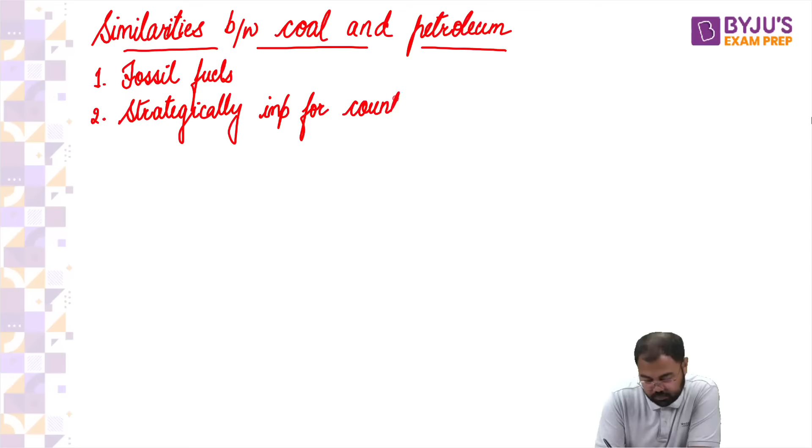So when it comes to petroleum, there are certain similarities and certain differences. Knowing the differences specifically is very important. Similarities between coal and petroleum: they both are fossil fuels, strategically important for the country's economy, and both contribute to pollution and global warming.

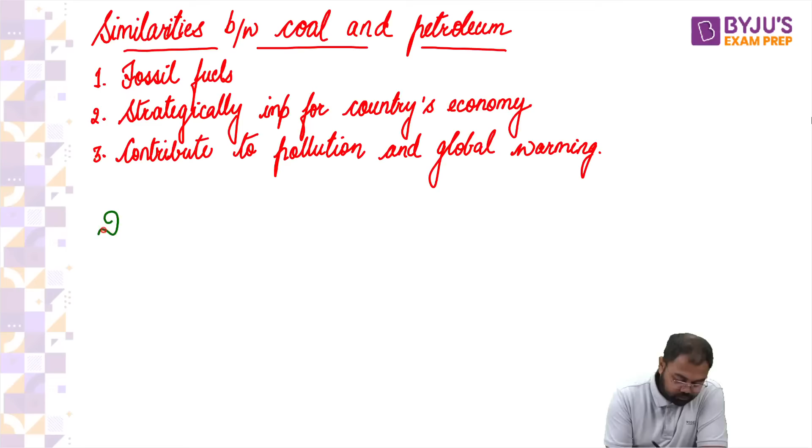Now, what about the differences? Let's look at certain differences between coal and petroleum. First and foremost, the origin. For coal, we had discussed that coal formation might have begun in the wetlands, in the marshy areas, in the swamps on land - swamps and wetlands.

What about petroleum? In case of petroleum, the formation might have begun underwater - the origin here has been underwater, meaning it started its formation underwater. It could be lake beds, sea beds, or ocean beds - in most cases seas and oceans, but even inland lakes might have led to the formation of petroleum. Then, another difference is the source.

Source for coal has been vegetation - all the trees and shrubs growing in the swampy areas contributed to the formation of coal. So the source has basically been vegetation on land, whereas in case of petroleum that's not the case. There might have been both plant and animal based sources - it could have been algae, or it could have been zooplanktons. So both plant and animal based.

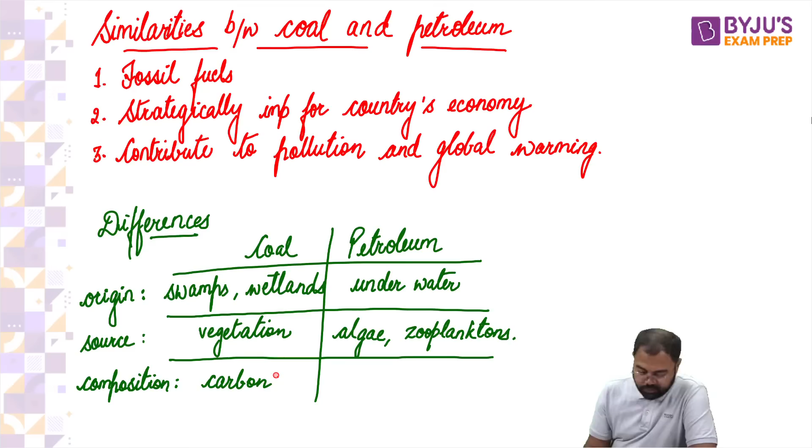Another difference we see is the composition. Coal is basically carbon plus impurities that might have mixed with it over time. Now, when it comes to petroleum, petroleum is said to be a complex mixture of hydrocarbons.

Hydrocarbons - we'll discuss what this means. So petroleum is made of a complex mixture of hydrocarbons. And then lastly, something very well known, the state: coal is in the solid state, whereas petroleum could be solid, liquid, or gaseous.

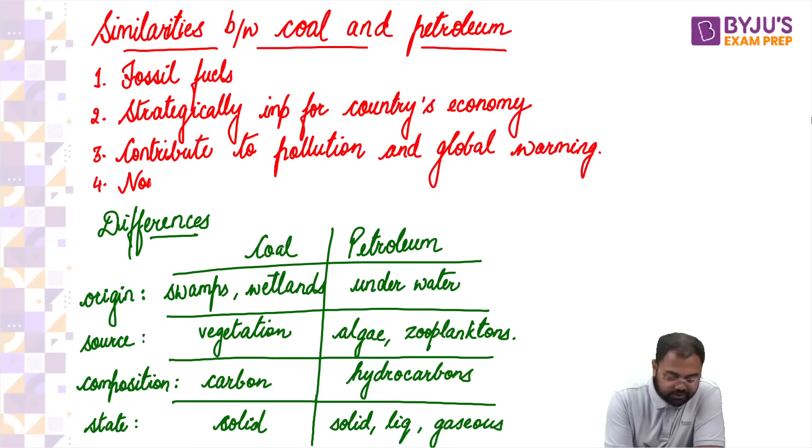So when you look at the science side of it, that's where you see they are different. Otherwise, the other factors show similarities between them, and that's why they're often counted together. One major thing I missed: they will both be called non-renewable. So in this manner, we see there are certain similarities and certain differences between coal and petroleum.

Now when we talk about petroleum, we say it's a complex mixture of hydrocarbons. So what do we mean by a complex mixture of hydrocarbons? What do we mean by a hydrocarbon? The name basically gives you a hint that you're talking about an organic compound - meaning a carbon based compound.

Hydrocarbon - where you have only carbon and only hydrogen, where any compound, any matter, any kind of material has only carbon and hydrogen. Apart from hydrogen and carbon, it does not have anything else. Then in that case, it will be called a hydrocarbon.

Now here we're saying it's a complex mixture of hydrocarbons. When we say complex mixture, it means you might have a lot of different types of hydrocarbons mixed together. That's why you cannot assign a chemical formula to petrol or diesel, because these are complex mixtures - there's no guarantee what exactly could be the chemical composition. There will be a mixture of all these hydrocarbons.

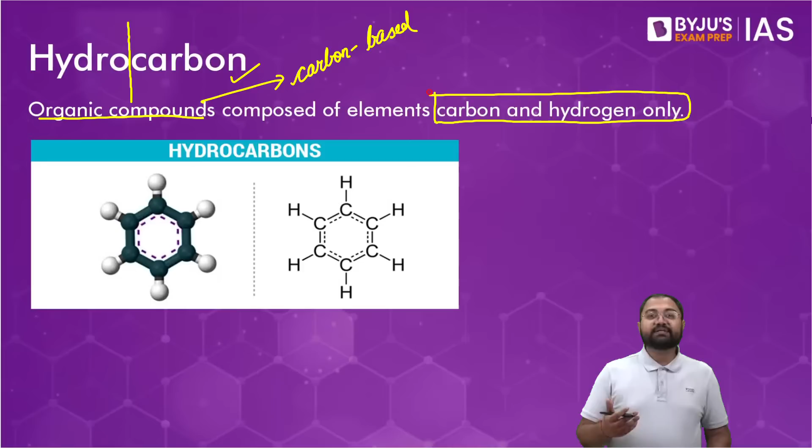So complex mixture - I'm just noting it out here: complex because it has many different hydrocarbons that could be mixed together in a petroleum product.

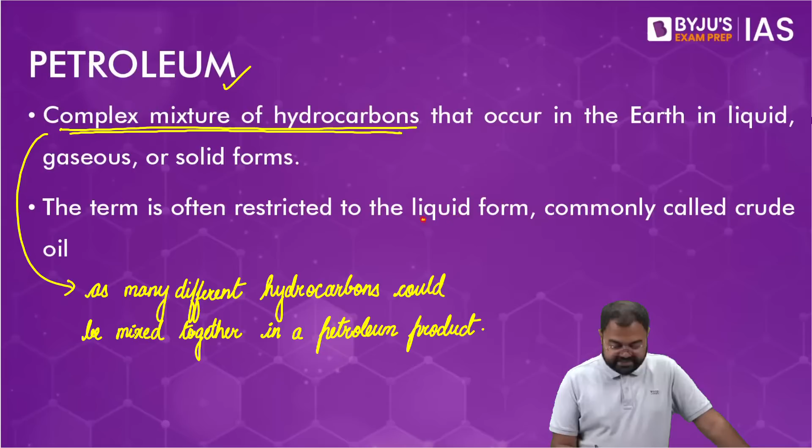So that is basically how we talk about petroleum, how we see petroleum. Often we restrict this petroleum to its liquid form, which is called crude oil. Crude oil is the raw petroleum. From this crude oil we get different types of petroleum, whether it is diesel, petrol, kerosene, jet fuel, naphtha, or even paraffin wax, etc. So crude oil is basically a mixture of all these different petroleum products, and we need to separate them out using a method called fractional distillation. But before that, let's talk about how the formation of petroleum happens.

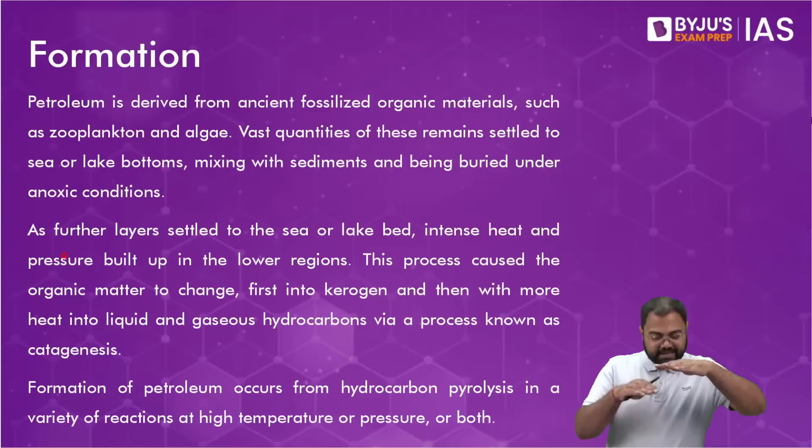Very similar to what we discussed about coal, the entire process is very similar. First and foremost, the formation here would have begun from organic material like underwater plants and animals. They might have gotten submerged under the seabeds or ocean beds, and while getting submerged, they would have mixed with the sediments. As they get submerged, they are going to get subjected to very high temperature and very high pressure, so under these conditions a chemical change would have started in this organic material.

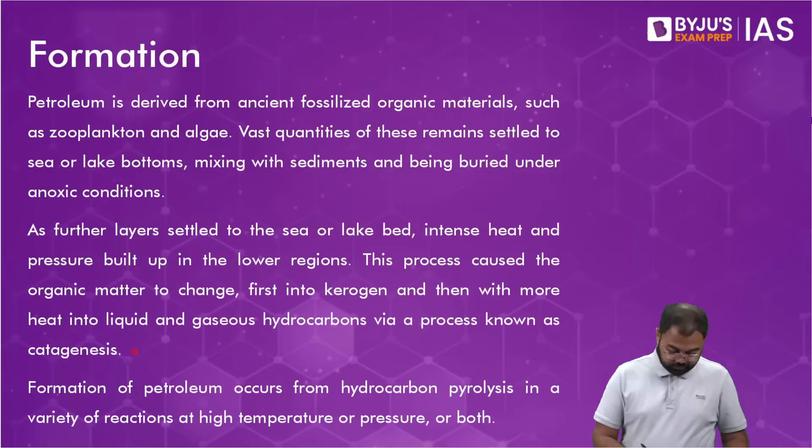And that is where the formation of something called kerogen first takes place. So kerogen is an intermediate stage between that plant or animal and the final petroleum product. So between the two, the intermediate stage that we have is called kerogen, which is in a manner the process of change of organic matter into petroleum. So first, the formation into kerogen happens.

Then there is a process called catagenesis, and this takes place next. Catagenesis is the breakdown of the carbon chains. In any organic molecule or hydrocarbon in these mixtures, there could be hydrocarbons with very long chains of carbon atoms, meaning the chemical formula could be C80, C90, etc., meaning that compound has 60, 80, or even 100 carbon atoms forming a chain-like structure. In catagenesis, these longer chains start breaking down into smaller chains of molecules, so from 80 or 90 odd carbon chains, you might see smaller carbon chains of just 10, 20, 15, 8, 7, etc. That breakdown from longer carbon chains into shorter or smaller carbon chains is called catagenesis.

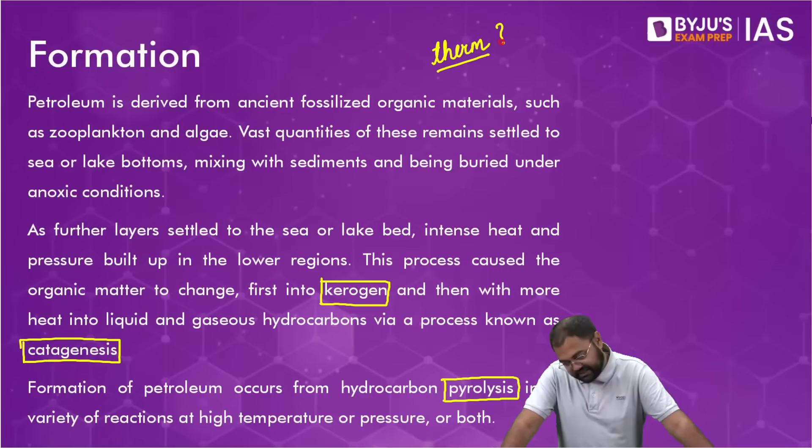Once that has happened, then there is the last process, called pyrolysis. This pyrolysis is nothing but a thermochemical decomposition of material in the absence of oxygen. Because you are submerged under the seabeds or ocean bed, the oxygen supply has been cut off, so there is no oxygen, and there is a thermochemical decomposition. Thermochemical decomposition means a chemical decomposition of the material happening at high temperature in the absence of oxygen. That's called pyrolysis. So these three processes are the key processes to the formation of petroleum from the organic molecule of the plant or animal.

Understood? So first and foremost, you have kerogen first. What is kerogen? Kerogen is an organic molecule which is an intermediate stage between the organic material and petroleum. So this is basically called kerogen. Now, one more thing to note: it is often found as sedimentary rocks.

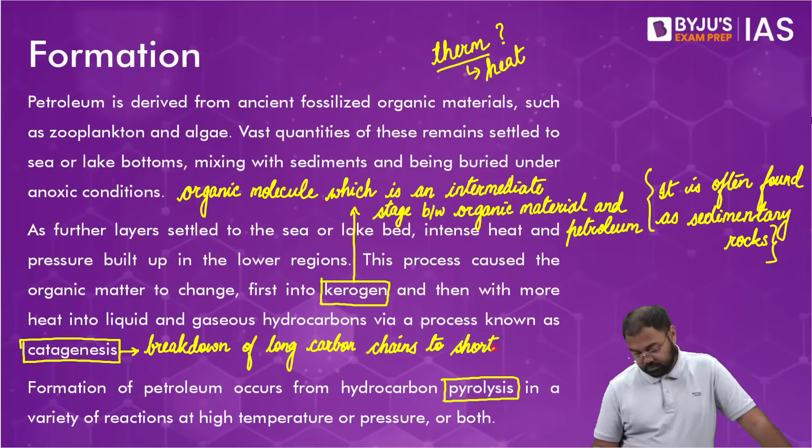Then after that we have catagenesis. Catagenesis is nothing but the breakdown of long carbon chains to shorter ones. So this is called catagenesis.

And then finally we have pyrolysis. So what is pyrolysis? Pyrolysis is the thermochemical decomposition of a material in the absence of oxygen. So this is called pyrolysis.

So all these processes together, they will lead to the formation of petroleum finally. Now, this petroleum product that we get, we get it in the form of crude oil. This crude oil is a mixture of all the petroleum products - petrol, diesel, kerosene, etc. They are all mixed in this crude oil, and we need to get these products out of it.

So for that we use a process called fractional distillation. Now when it comes to fractional distillation, understand what exactly we do here. Distillation is a process that we often use whenever you have to separate two liquids, two miscible liquids, meaning when two liquids mix in one another.

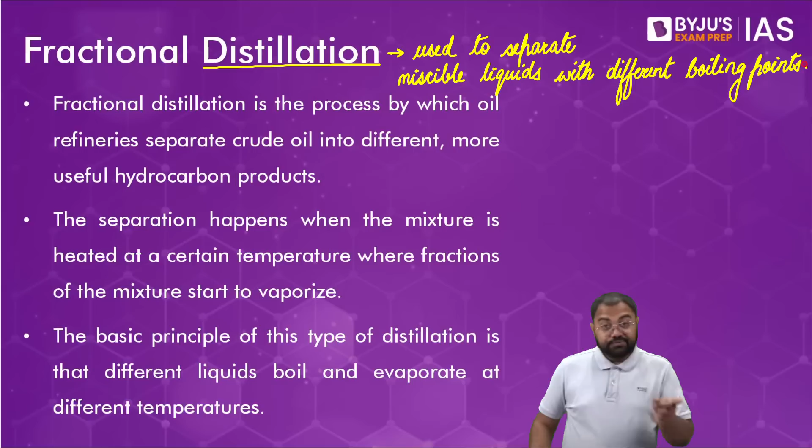Now, fractional distillation as a process is used whenever the difference in the boiling points is not that great. Meaning, if the difference in the boiling point is like just 10 degrees or 15 degrees or maybe up to 25 degrees Celsius, then we cannot use this direct method of heating.

Then in that case, we use an indirect method called fractional distillation. In this process, what we basically do is take this crude oil and heat it to a very high temperature, where all the parts or fractions of this crude oil are in their gaseous or vapor form. We first heat it above 400 degrees Celsius, and then we start to cool it down slowly.

As we cool it down, we'll start getting all these fractions one by one, all these different types of petroleum. So at 400 degrees Celsius, first you'll get lubricating oil, paraffin wax, asphalt, etc. And as you keep decreasing the temperature, you'll keep getting all the different types of petroleum.

So fractional distillation is something that we will use when the difference in the boiling points of the liquids or fluids is generally less than 25 degrees Celsius. So when the difference in boiling points of the liquids or fluids is less than 25 degrees Celsius, fractional distillation as a process would be preferred.

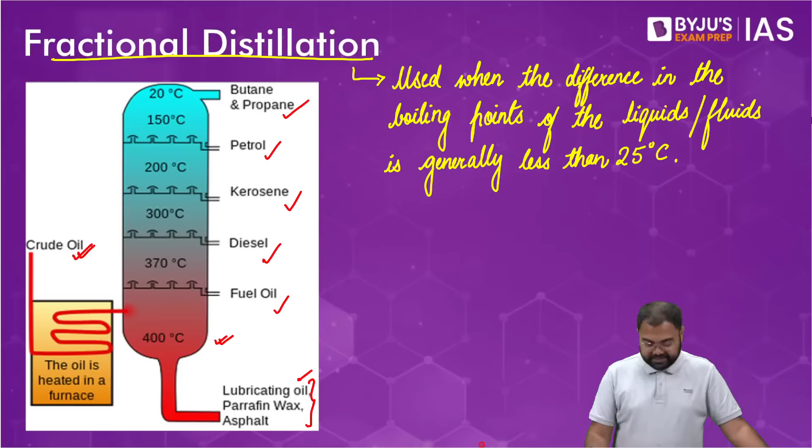So this is basically what we do: fractional distillation is used when the difference in boiling points is very less, and the normal distillation process is used when the difference in boiling points is good enough. This is how the process of distillation or fractional distillation is used, and this is how we get all the different types of petroleum products.

Now, apart from coal and petroleum, there are some other non-renewable sources as well, which are non-conventional sources. Why do we say these are non-conventional and non-renewable? Non-renewable, obviously, because they are available in a very limited quantity. But at the same time, they are also non-conventional because they are newer sources of energy that we haven't known about traditionally, and that's why we haven't used them. So these are called non-conventional and non-renewable sources, where the first source here is shale.

Now, when it comes to shale, what we see is that shale is something that we get from a layer of shale rocks. We basically drill a well to this layer, and once we've gone to this layer, this is where we also start drilling horizontally. As we drill horizontally, cracks are produced in this layer, and that is where we have a lot of trapped gas, which is called the shale gas.

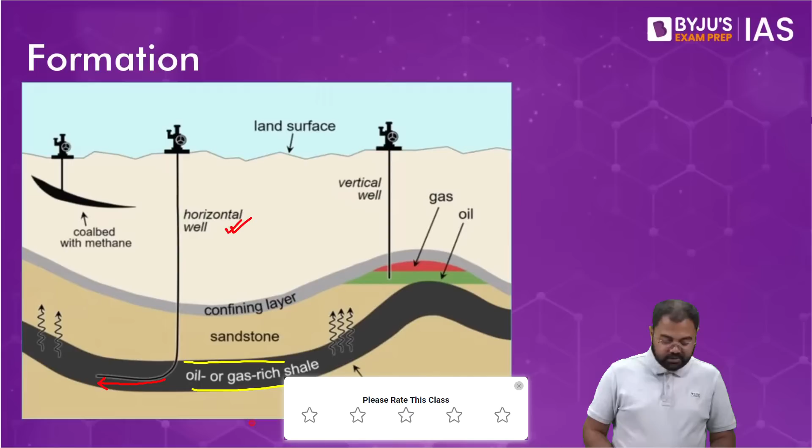These are also hydrocarbons, largely methane and ethane, but these are trapped in this layer of rocks, and these rocks are called shale rocks, which is why the gas we extract from there is called shale gas. So this is basically how the formation, or rather the extraction, of shale gas happens.

Now, when it comes to shale, why do we say this is an unconventional source? We are saying that this is non-conventional and non-renewable. This is basically a newer source, as I told you.

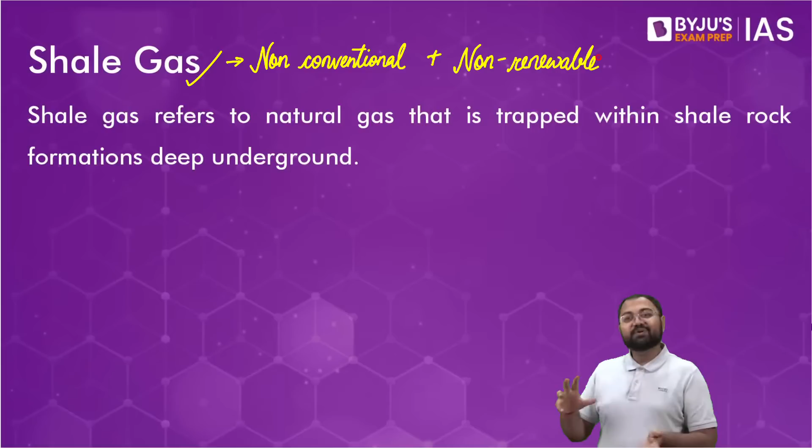First it was the US, and the US found that they have large deposits of shale. The amount of shale resources they found was so high that before the discovery of shale, the US used to be a net importer of energy. They used to buy energy because they had a deficit as per their requirements. But after the discovery of shale, and finding such a huge deposit, they went from being a net importer to becoming a net exporter of energy. So that's the difference that has come here.

The US was the country that found shale, and then others also. In a manner, natural justice was done, as Russia also found a lot of shale. So there's a balance - Russia has shale, US has shale, and China also has shale. That's why the world is relatively at peace. Well, the world is not at peace, I can't say that, but all these powers were able to find sources of shale. So this became a non-conventional, non-renewable source of energy.

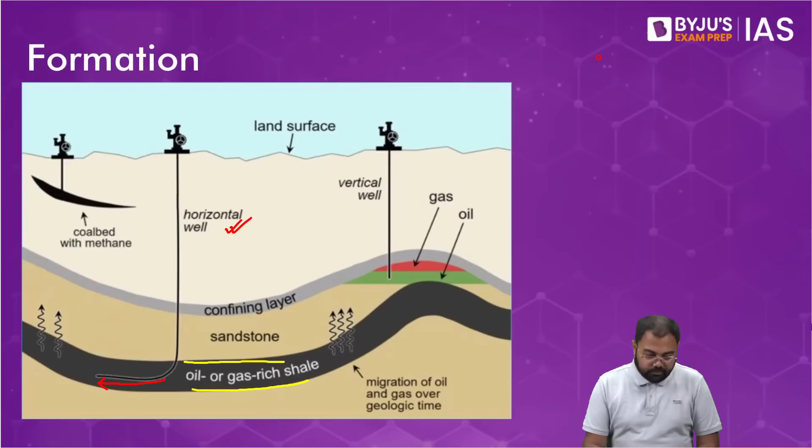ONGC did a research, a lot of studies in India. Between 2011 to 2021, they did a lot of research looking at all these different sources of shale. But ultimately they said that we don't see a big promise. The shale resources that India has are not at all comparable to what China, US, or Russia has.

So we cannot count shale as a big source for us. We cannot look at it as an alternate source - we can see it as a small additional source. Perhaps we'll start extracting energy from here, but the promise is not that great, and that's why we cannot be dependent on it as a future source of energy. Although there is a pilot project that they started running, ultimately they said they are not really hopeful with regards to shale in India - the source is very weak and very less.

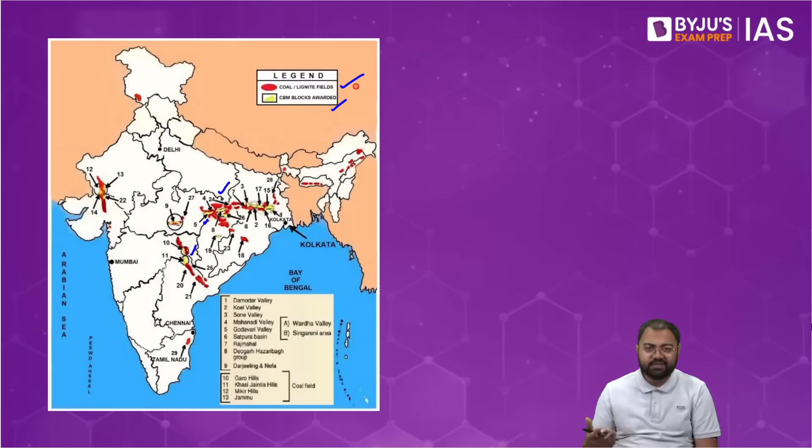The coal ministry also has said that they'll be actively trying to extract coal bed methane wherever it is possible. Otherwise all that methane gets wasted, which is not good, because we know that we can use this as a source of energy.

Now after this we have methane hydrate. When it comes to methane hydrates, what do we mean by hydrate? First of all, what do we mean by hydrate? Water, right? So wherever you have molecules of water, any compound with molecules of water will be called a hydrate.

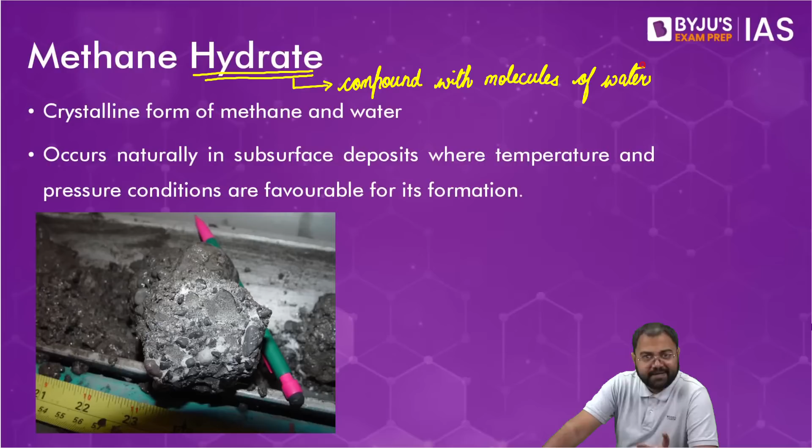So there is a very simple example in our daily lives of a hydrate that we use. Because when it comes to hydrates, it does not mean that it has to be liquid. You can see here in the picture, it's a solid form, correct? So a hydrate even at room temperature does not mean it will be a liquid. There's a very simple example that I'm sure every one of us has been using, of a hydrate molecule in our homes. Can you give me the example? Otherwise, I'll give you.

What is the hydrate molecule that we are using in our daily life? Salt is a crystal, not exactly. Soap, in a manner you can say, but a better example would be washing powder. Just go and look at the chemical formula for washing powder, you'll see that it basically has water molecules in it. So it's not that because of having water molecules it's in a liquid state. Just that when you mix it with water, it will simply mix. Otherwise, it is something which is a hydrate molecule. So just remember, why I'm giving this example is simple - I don't want you to imagine that if it's a hydrate at room temperature, it will be liquid. Not entirely the case always.

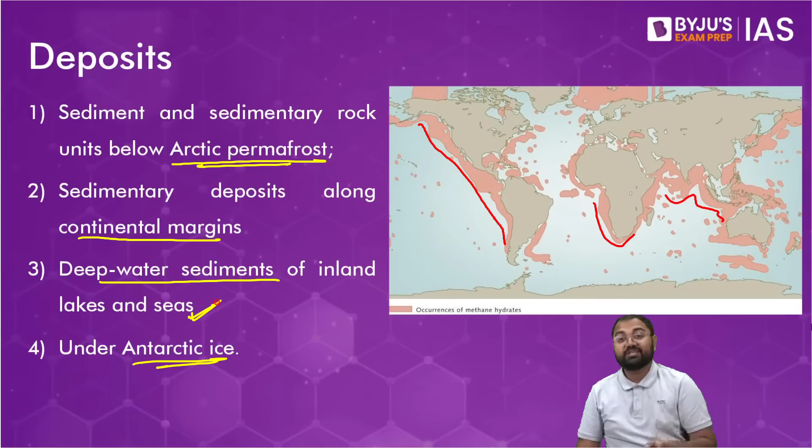Now, in case of methane hydrates, there is one very interesting fact that we need to know, and that is basically from an environmental perspective. And interestingly enough, a question already has been asked in your paper. Read this question.

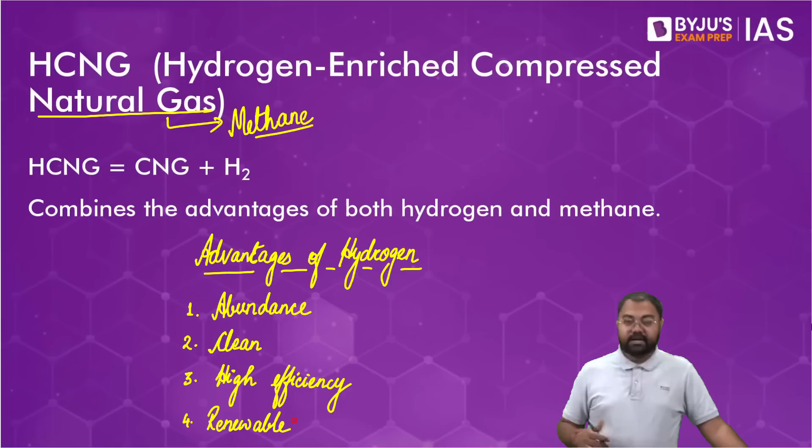And then it has high efficiency. That's another advantage that hydrogen gives. So that's the reason why we want to use hydrogen: because it is very abundant, it is a very clean source of energy, and it is very highly efficient. And that's why, in a manner, you can say that hydrogen becomes closer to being renewable. So that also adds to the advantage, and that is why HCNG.

With HCNG, we see that it will be able to reduce emissions of carbon monoxide, enable fuel savings. Then the engines can be calibrated to release lower amounts of nitrogen oxides. Similarly, the modifications required in engines are also very minimum. If an engine is running on CNG, it will run on HCNG also. So it's not that we need new infrastructure or entirely new types of engines.

Engines that work on CNG would, with very minor calibrations, be able to work on HCNG also. Then it can be used for high load applications and heavy duty vehicles, buses, trucks, etc. That's basically what we saw in Delhi, where a pilot project was taken by the government of India, running buses in Delhi on HCNG as a pilot project, just to understand the viability of using HCNG and whether we are in a position right now to start using it. For almost 6 months, a few buses in Delhi ran on HCNG to test it out, and now we are analyzing all the positives and negatives from that project. Depending on that, in the future we'll look into the viability of running public transport on HCNG.

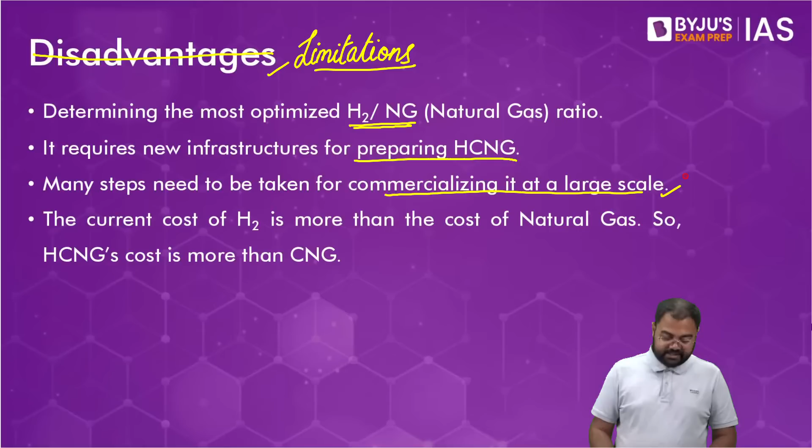Then commercializing it at large scale will take a lot of effort, investment, infrastructure setup, calibrations in the engines, and HCNG production. There are many things — even before that, hydrogen production, so that you can use it for HCNG. So there are a lot of things before you can actually commercialize the use of HCNG. And obviously the current cost of hydrogen is also a problem, because right now the cost of hydrogen is more than that of CNG.

When you are making HCNG, combining the two, the cost will be higher. The cost of production of HCNG will be higher than the cost of production of CNG. So that becomes a problem, because if you want to use it for public transport, you cannot ask the public to pay more. The government will have to take the responsibility, and that's a negative aspect, the spending that the government will have to do. So from that perspective, this is not that great right now. The cost of manufacturing hydrogen is actually leading to this kind of issue, so that's why these are all the limitations.

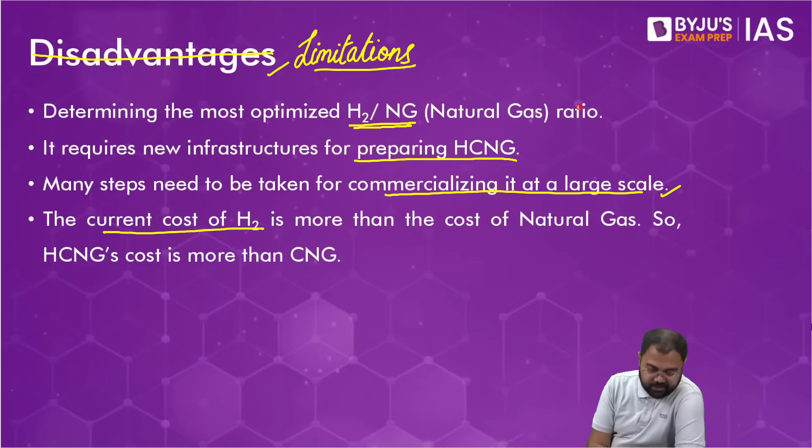First, the main advantage of the use of HCNG is the elimination of carbon monoxide. Remember we discussed something called extreme words? Elimination can also be bracketed as an extreme. Elimination means completely getting rid of carbon monoxide. But what did we discuss? We discussed that it reduces the amount of emissions of carbon monoxide. We cannot say that it eliminates carbon monoxide. So that's why elimination is wrong, and A cannot be your answer and D cannot be your answer.

You are left with either 2 and 3 only, or 4 only. So let us look at 4. HCNG makes the fuel less expensive than CNG. It's the opposite, right? We discussed that hydrogen production is costly, so it will increase the cost of CNG. That's why HCNG is costlier as compared to CNG, so statement 4 is wrong. So anyway, we are left with only one option, that is 2 and 3 only.

The second statement is HCNG as fuel reduces carbon dioxide and hydrocarbon emissions. Yes, that's correct, and that is why we are looking at hydrogen, because hydrogen is clean. We had discussed this. Hydrogen up to 1/5 by volume can be blended with CNG as fuel for buses.

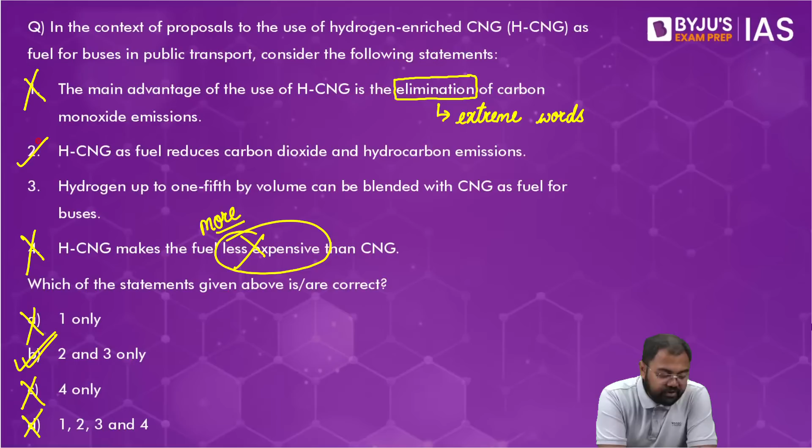Now, this is a difficult statement. I would never be able to mark on the basis of statement number 3 unless I have the exact information from the newspapers, so statement number 3 could have become difficult. But in this particular scenario, we are not dependent on statement number 3 to answer this question. Yes, if they come to the present format, where they ask whether only one statement is correct, or two statements, or three, or all four, that is where this becomes an extremely difficult question to answer.

But with the elimination technique of the past, now elimination technique also has not been eliminated completely. Yes, there still are such questions, but this time the number of those kinds of questions were huge. There were, I think, 49 questions where it was one statement only, two statements only, and so on kind of pattern. In that pattern, it would become a very difficult question, because statement number 3 is very factual and makes it extremely difficult to answer. But with the elimination technique that works here, it becomes easier for us to answer this question.

All right, so this is it about HCNG. This basically brings us to the end of all the non-renewable sources of energy. Now we come to the renewable sources of energy, and this is where we start with solar energy.

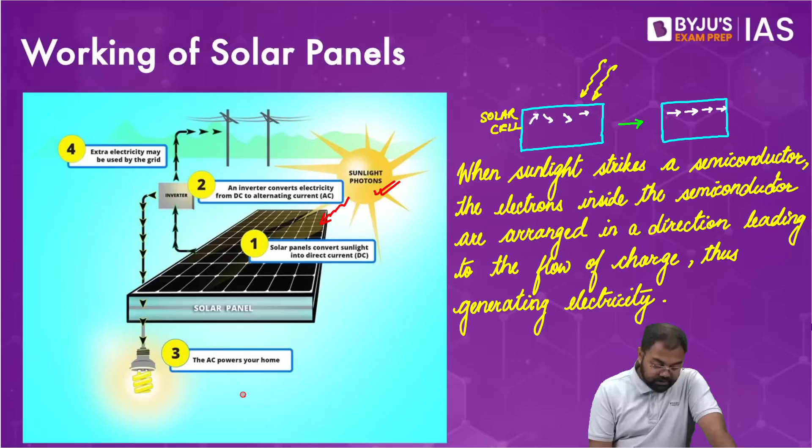It is called direct current or DC, and this DC has to be converted into AC, or alternating current, if you want to provide electricity to the houses. So for that we use an instrument called an inverter.

We use something called an inverter, and with the help of an inverter we see that the direct current can be converted into alternating current.

Now direct current is the kind of current, or the kind of electricity, that we can store.

So for example, let's say any electrical device, any electronic device, a device that uses a battery. Inside the battery you have stored energy or stored electricity that you can use whenever you want. So that is direct current, the stored electricity or the stored energy.

But that's not something that our houses use for providing electricity. For that, there's another form of electricity called alternating current. It's called alternating current mainly because it alternates its direction, reversing every second, or multiple times in a given second.

So it's called an alternating current. The power supply that we get in our houses is basically alternating current. And that's why we use an instrument called an inverter.

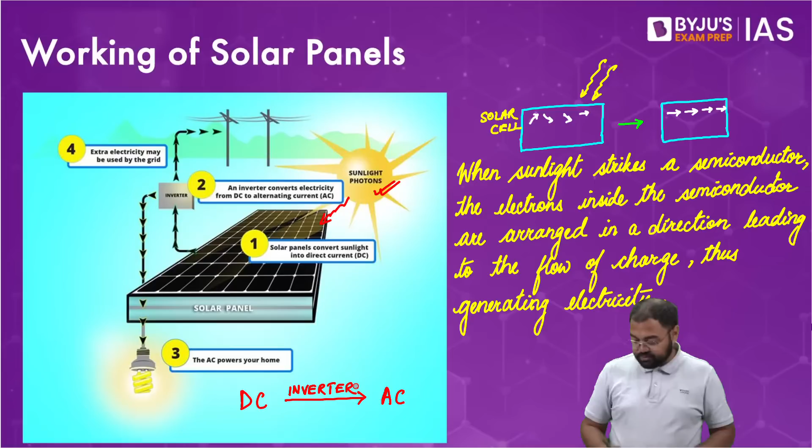So this is basically how the working of solar panels happens. This is how solar panels basically work.

Now, apart from solar panels, one more device that has been very important in India has been solar pumps. In the last 3-4 years, there has been a lot of emphasis given to solar pumps, especially the use of solar pumps in agriculture. Solar pumps are basically something we are trying to use to replace diesel pumps and other pumps. There are schemes also that have been run so that this can be achieved.

So solar pump, first and foremost, is the pump which will provide water, maybe for irrigation purposes, largely in agriculture. These pumps will be connected to solar panels, and they'll provide you energy with the help of the solar panels. So instead of using diesel, we'll be able to use solar energy for the production of electricity.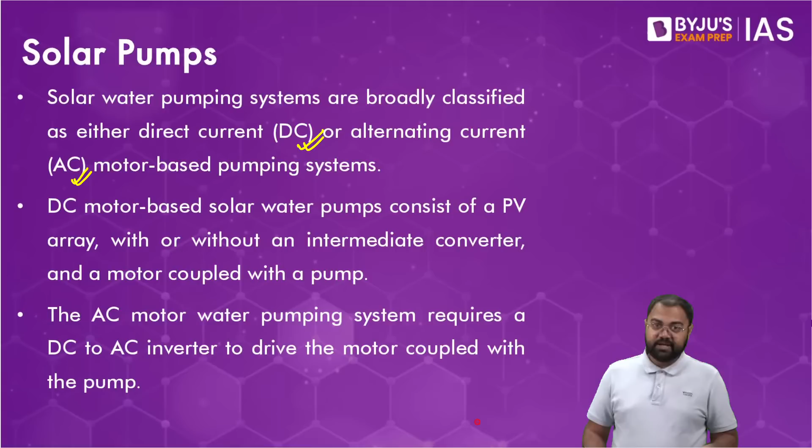Now, solar pumps can either be DC or AC based, depending on what kind of technology, what kind of electricity we want, whether we want to provide stored energy or whether we want to directly connect it to electricity supply. Depending on that, it can be either a DC or an AC solar pump.

Now, most importantly, there are two types of pumps: one which is called the submersible pump, and the second which is called the surface pump. In case of a submersible pump, this is the kind of pump where the pump is situated underwater. That's called a submersible pump.

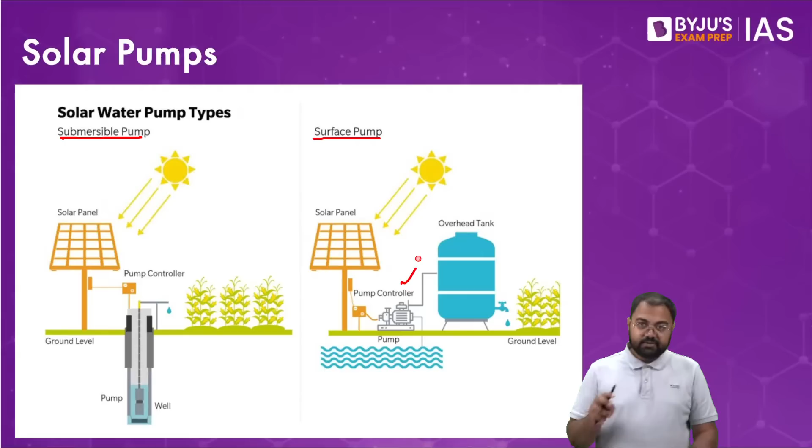And in case of a surface pump, the pump will be kept near the body of water, not inside it. Generally speaking, if you have a stagnant source of water, then submersible pumps work well. But if you have a flowing source of water, then surface pumps suit better. For example, if you have a well, a lake, or a dam, submersible pumps work very well. But if you have a river or a canal, surface pumps become good. So these are the two technologies in solar pumps that are often used.

So that's why we have surface pumps and submersible pumps. Now, when we look at surface and submersible pumps, one more way in which technology is used in these pumps is centrifugal and positive displacement pumps.

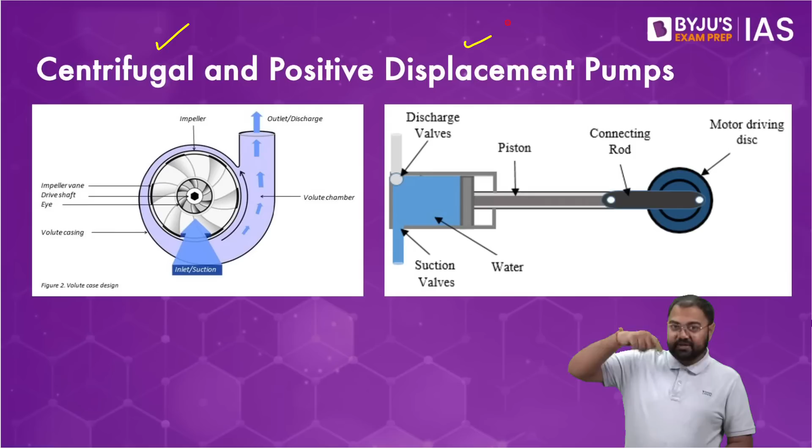Now, a centrifugal pump is the kind of pump that uses centrifugal force. If you remember from the last chapter, when you have a circular motion, the force exerted outward in that circular motion is called centrifugal force. When we use centrifugal force in a pump, it is called a centrifugal pump. So basically, there is a motor inside the body of water, and as the motor rotates, it keeps throwing water outward. So in that case, it is called a centrifugal pump.

The second one is a positive displacement pump. This kind of pump works very similar to how an injection works. If you've seen an injection, when they draw something from a vaccine bottle, they pull the piston. As they pull this, there is a pressure difference created inside the injection, and because of this pressure difference, there is a capillary rise - the liquid rises inside the injection. Something similar is used in positive displacement pumps - you have a piston, and as the piston goes up, the water level also rises in the pump. So that is called a positive displacement pump.

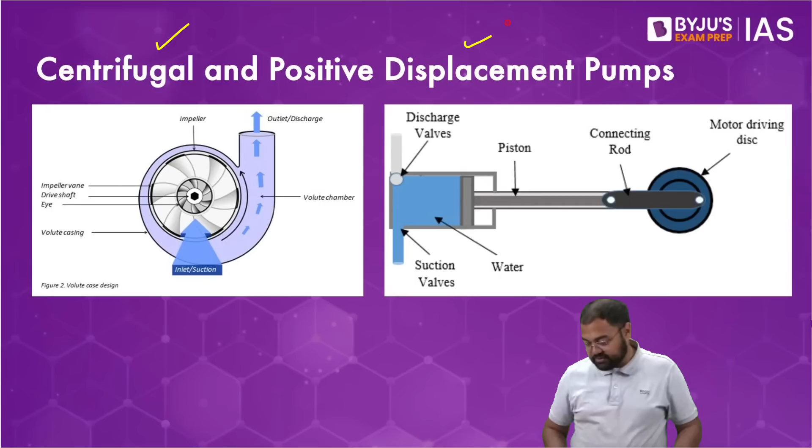So that's your centrifugal pump and the positive displacement pump - these are the two types of technologies that are used in solar pumps.

Now, in all these scenarios, there is a scheme called the PM KUSUM scheme.

Under the PM KUSUM scheme, the basic objective is to replace diesel pumps with solar pumps, and also solarization of newer agricultural fields. Wherever you did not have any irrigation facility or pumping mechanism, or even where diesel pumps are already working, these newer areas have to be tapped and pumps provided. At the same time, wherever diesel pumps are already in use, they want to replace them with solar pumps, which has its own advantage.

What's the advantage? First and foremost, you're not using diesel, so you have the environmental advantage. At the same time, agricultural diesel is subsidized, so the government loses money giving it at a subsidized rate. Even for the farmers, even though they're getting subsidies, they still have to keep spending that money to get the irrigation facility. So all these are certain limitations of diesel pumps and other technologies right now.

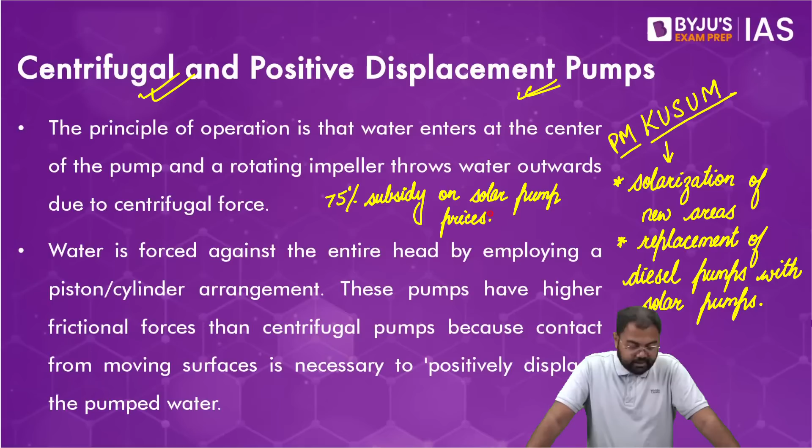In this scenario, they'll be able to make it affordable for the farmers. This 75% subsidy means that if the cost of a solar pump is rupees 100, the farmer only has to pay rupees 25, and the rest 75 rupees will be shared by the center and the state government. So they'll be able to provide this subsidy so that it makes it easier for solarization to happen.

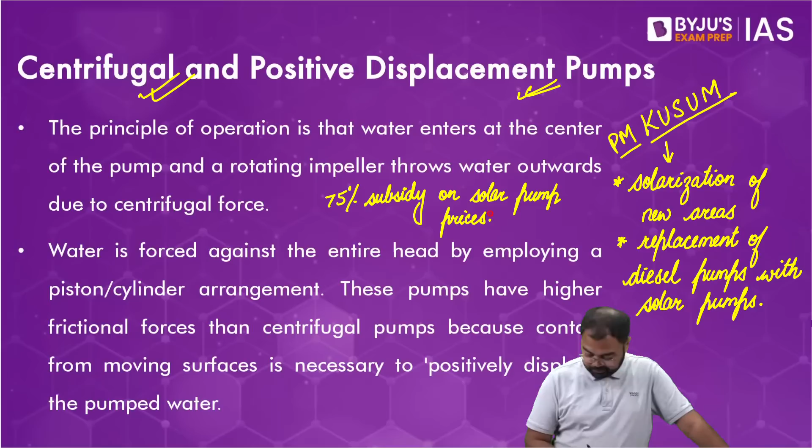Ultimately, there is something called the National Solar Mission. As a part of the National Solar Mission, the target kept was 100 gigawatt by 2022. Initially, the target was only 20 gigawatt, but it was revised on the sidelines of the Paris Climate Summit that happened in 2015, from 20 gigawatt to 100 gigawatt.

So we see that the National Solar Mission ultimately tries to increase the solar installation capacity that India has, the total installed capacity. We are trying to increase that capacity with the help of the National Solar Mission, and that's why there are multitude of schemes that India has launched, all helping improve our solar energy capacity. This National Solar Mission becomes very crucial from the perspective of India's solar capacity.

So, to have long-term policy, long-term deployment goals, better research and development, and also to get domestic production of critical raw material, components and products. This is also very important, because this is where India also landed in a controversy.

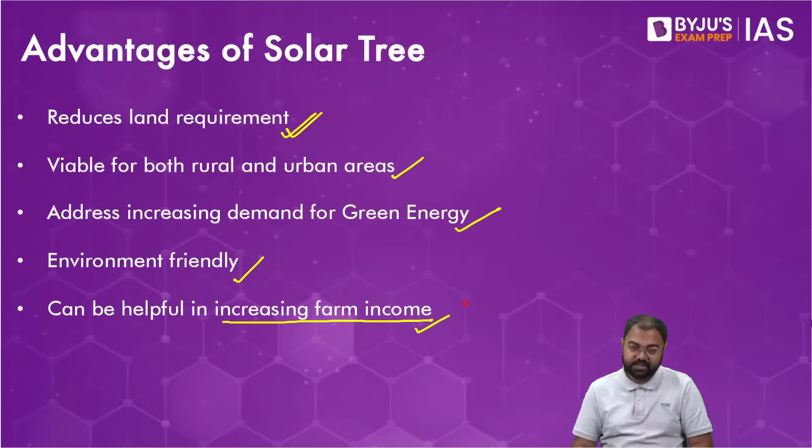They help address the increasing demand for green energy, because this is how solar energy can grow exponentially rather than the slower growth it usually sees. Obviously environmentally friendly, and can also be used to increase farm income for farmers who allow installations on their land, as a part of the benefit can be given to them.

So overall, when we look at the advantages of solar energy, many are self-explanatory. It is renewable, environmentally friendly, and has wide availability because sunlight is everywhere, so we don't need to think about its availability. It is also versatile, as it can be used in many forms.

Low noise, because there is no movement and no machinery, so there's no noise factor. Maintenance requirements are low, and it can very easily become a remote and portable power option.

The return on investment is high because, ultimately, the initial investment in solar energy could be a little high, but since it can work for a very long time, that's not really a concern. So the return on investment is very good.

Then security is increased. Now, what does energy security mean? It means that we become self-dependent for our energy requirements. That is called energy security, and we obviously want energy security in one way or another.

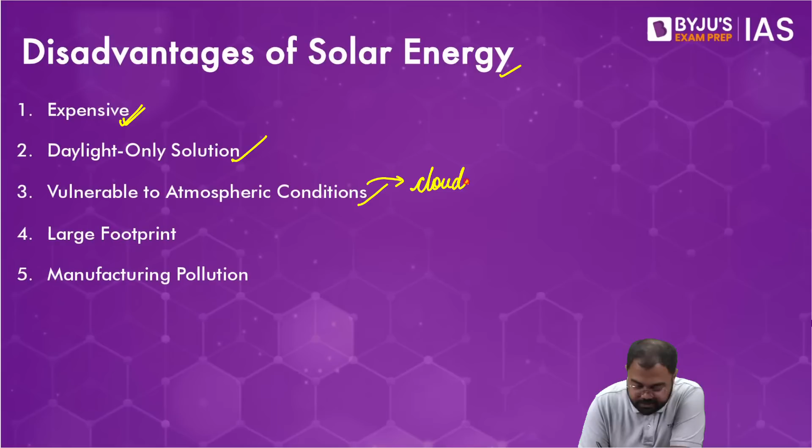It is vulnerable to atmospheric conditions—rain, cloudy weather, or even air pollution. In case of air pollution, the smog that often develops in winter months can also lead to reduced electricity production through solar energy. So clouds, rain, or air pollution can all reduce production.

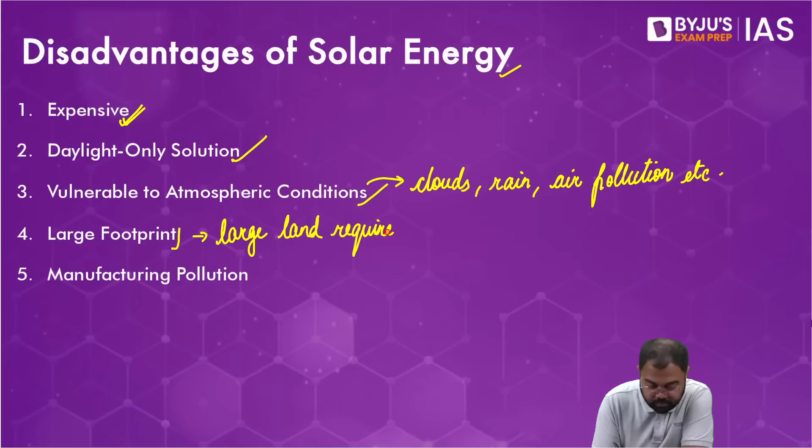Then there's a large footprint, basically the large land requirements we discussed earlier. And lastly, manufacturing pollution—this is the kind of pollution that happens during the manufacturing of solar panels and other key components.

One more problem is the waste that will be generated. For example, a normal solar panel is functional for 10 to 15 years. Right now we don't see it as a threat because most of our solar panels are newer—from 2016, 17, 18 onwards, a lot more solar energy has been used. But once they reach the end of their functional life of 10 to 15 years, disposal of the waste will become a problem, and it can threaten e-waste management.

So that's another point we need to understand—how exactly do we recycle or get rid of the waste. These are the problems we have with solar energy. But whatever the scenario, there is no better source than solar energy. It is one of the easiest and most easily available sources to use, so these disadvantages are nothing compared to the advantages solar energy is able to give.

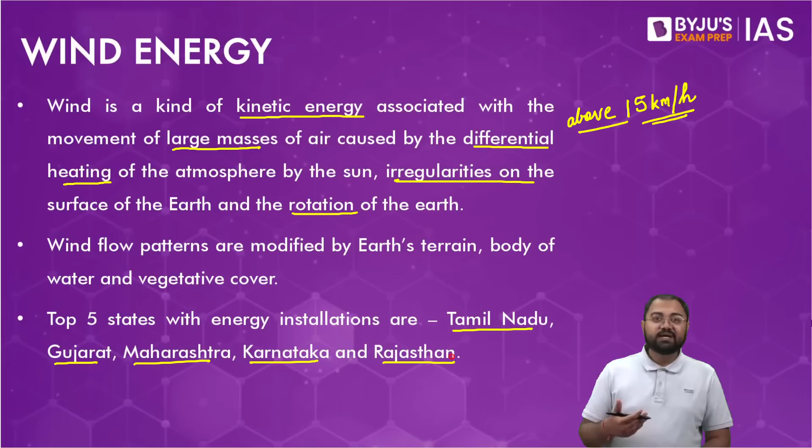So wind energy is a source where coastal states will be able to contribute more as compared to inland states, because you need a certain movement to happen. That's why when the speeds are above 15 kilometers per hour, that is where it becomes easier for us to harness wind energy.

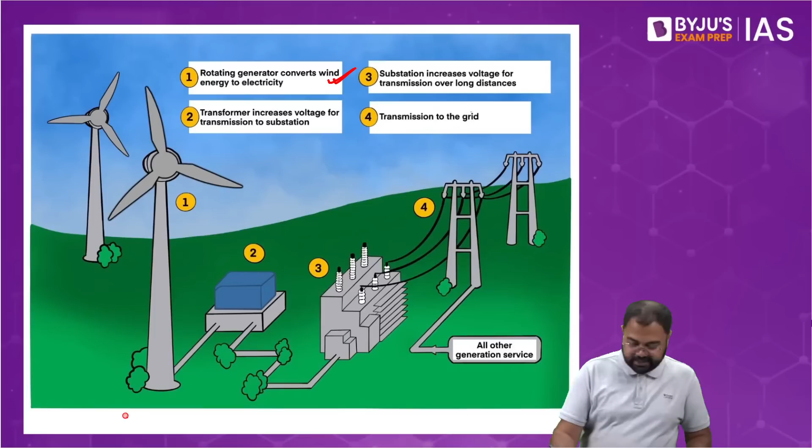Now, with regards to wind energy and how it functions, first and foremost, the rotation of the wind fans will happen. Windmill fans will rotate, and with this rotation, kinetic energy is produced. We know that energy produced due to movement is called kinetic energy. So that kinetic energy of the air, the movement of the air, will lead to the movement of the fans, and that is ultimately converted into electricity. So basically there is a conversion from kinetic energy to electricity. This is how the conversion of energy takes place.

Now, in case of wind energy, there is something that has been growing now called offshore wind energy. In case of offshore energy, instead of installing on the coast or in inland areas, we are going into the body of water, on the continental shelves, and that is where these installations are now being done. This is an energy source that has been growing, although not as fast as the onshore wind energy, but offshore wind energy is also growing. For example, according to last year's end of year report, the total capacity of the world right now is 63.2 gigawatt.

Just imagine that when it comes to onshore wind, India itself has achieved up to 45 gigawatt as of now. In offshore wind, the entire world combined has been able to generate up to 63.2 gigawatt. Getting used to offshore wind energy is not that easy.

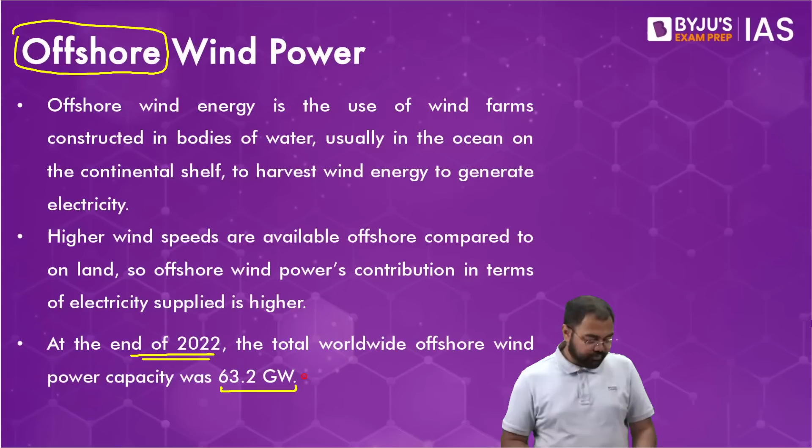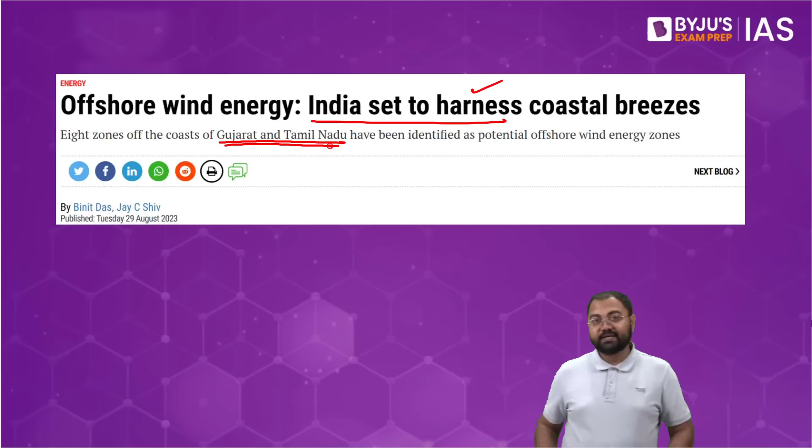That's why right now we have been trying, but it's not that we have been moving very fast. India also has been trying, and we have picked certain zones, mainly in two states, Gujarat and Tamil Nadu. These are the areas from where we are going to begin, and there is a pilot project that we have started.

At the same time we are also taking help from some other countries, because when it comes to the growth of offshore wind energy, we have seen that the European countries have done very well, especially the North European countries. Apart from that, China has been doing very well, and of late China has been very aggressive in setting up offshore wind.

They not only have been using their own coastal areas, but also controversial waters, for example the South China Sea. In those areas which are claimed by other countries, China doesn't care. Unfortunately for us too, we have been facing that a lot. But in those waters, they simply set up their infrastructure for offshore wind power, and that's why China has been growing very fast with regards to offshore wind.

Right now the European countries lead, but I'm very sure that very soon China will start leading when it comes to offshore wind energy. We have been taking help from some European countries which have been very good with regards to offshore wind, who have some experience with it, so these countries will be of good help.

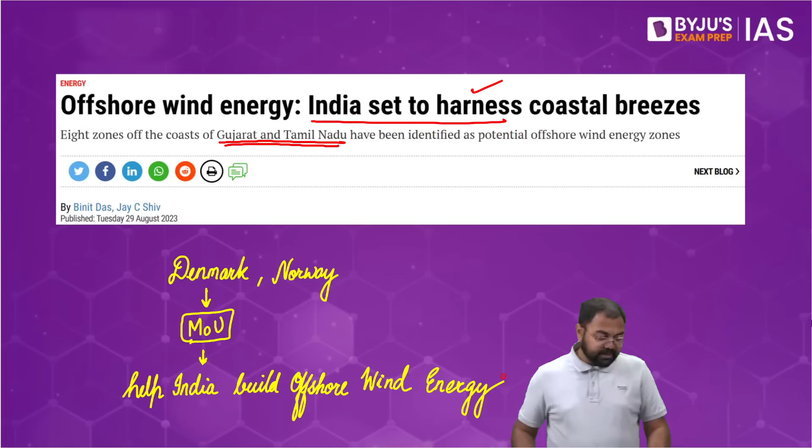We already see that these are the things India has been working on, and we have been contacting the governments of other countries as well. For example, with Denmark, we have signed an MOU, so that Denmark will help India build offshore wind energy. In this manner, we see that we have been actually working on all these projects.

But harnessing offshore energy is not going to be very easy. First and foremost, a lot of data collection is required, because we need to understand whether the area we are choosing is suitable, to study the suitability of an area.

To study the suitability of an area with regards to the long term setup, for example any natural calamity possibilities, whether cyclone, earthquake or tsunami could hit those kinds of areas, and also with regards to the wind direction and speeds.

So we'll have to check all these things. For example, when you look at the eastern coast of India, especially the coast of Odisha, we know that it has been one of those areas highly prone to cyclones. So those kind of areas will be avoided, otherwise we might set up and it might get destroyed in these situations. And then a lot of investment is required in the setting up process as well, so that's also one of the problems.

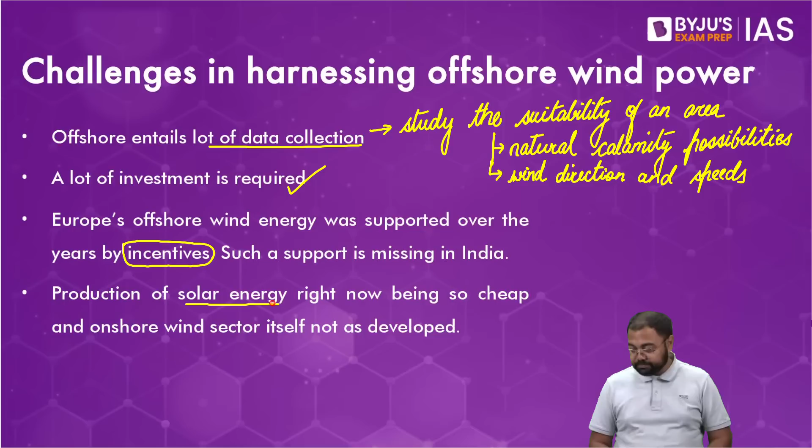But when it comes to disadvantages, first, the fluctuations are a big problem. Fluctuations, because we need a certain wind speed, only then is harnessing possible. So that is one of the issues we have. Apart from that, it can also become expensive initially, just like what we discussed in solar energy. But again, because the maintenance requirements are low, it functions for a very long time, so overall the return on investment is very good. But initially it is expensive.

Then it can also pose a threat to wildlife, and this is something we need to understand very well. What can happen is that wherever you are setting up a wind farm, obviously the fans of the windmills will keep moving. For the birds living in nearby areas, this can become a menace, because they would understand that they might possibly hit the wind fans and lose their lives. So they would also understand that, and they'll start avoiding those kind of areas. They might perhaps also start looking for a new habitat altogether, because now they also know their movement in this area is not that easy.

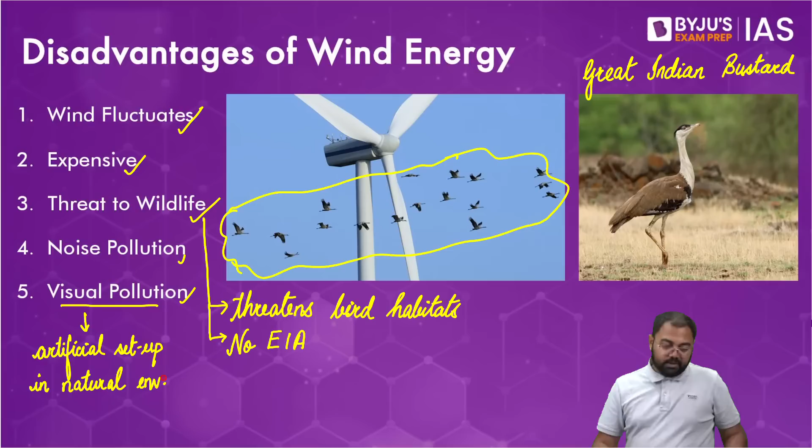So you have to understand that there are certain limitations or disadvantages that come with these sources. Now, coming to our next source of energy, that is geothermal energy.

Understand what geothermal energy is. You have two words here, geo and thermal. Geo is something related to the earth, which is why you study geology, geography, etc. And thermal, as we discussed, is related to heat.

So when we talk about energy coming from inside the earth, from the heat trapped inside it, that is called geothermal energy. In a manner, the heat from inside the earth is the geothermal energy. As you go below the earth's surface, the temperature keeps rising. At around 6,000 kilometers below, near the core, the temperature can be as high as 5,000 degrees Celsius.

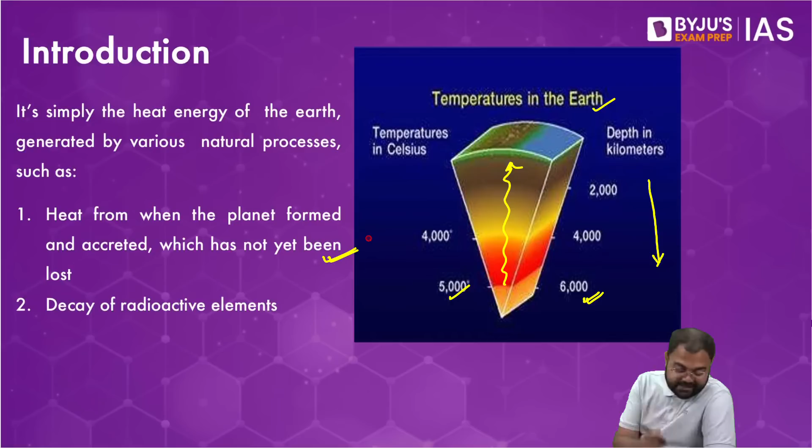There are chances that this heat is able to vent out towards the surface. If this heat comes towards the surface, this is the heat we can tap and use as energy, and that becomes geothermal energy. So one source is the heat trapped inside the earth since its formation, and second, the decay of radioactive elements can also lead to the generation of geothermal energy.

What exactly are radioactive elements and how they heat up, we'll discuss later, maybe in the next class when we cover nuclear energy. For now, just remember there are two sources: the heat inside the earth since its birth, and the radioactive decay of elements. This is where we get geothermal energy from, and there are multiple types of reservoirs from which we can obtain it, such as hot springs, volcanoes, or even geysers, which all can become sources of geothermal energy.

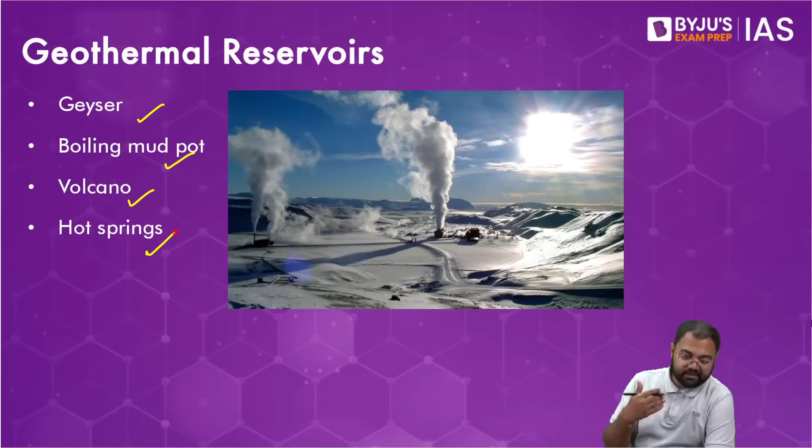Now, when we look at these geothermal energy plants, we see that there are different ways in which geothermal energy is being used. There are three different types of geothermal energy plants: dry steam power plant, flash steam power plant, and binary cycle plants. These are the three ways in which we can get geothermal energy.

First and foremost, we have the dry steam plant. Just understand the basic principle of how they work. In case of a dry steam plant, the heat from inside the earth comes to the surface, goes to the turbine, leads to the movement of the turbine, and with that movement you get electricity. Then from there it goes back, and the cycle repeats.

They pipe hot steam from underground reservoirs directly into the turbines from geothermal reservoirs, which power the generators to provide electricity. So this is basically how a dry steam power plant works. You keep getting the heat from here, take it to the turbine, and send it back, and in this cyclic manner it keeps working.

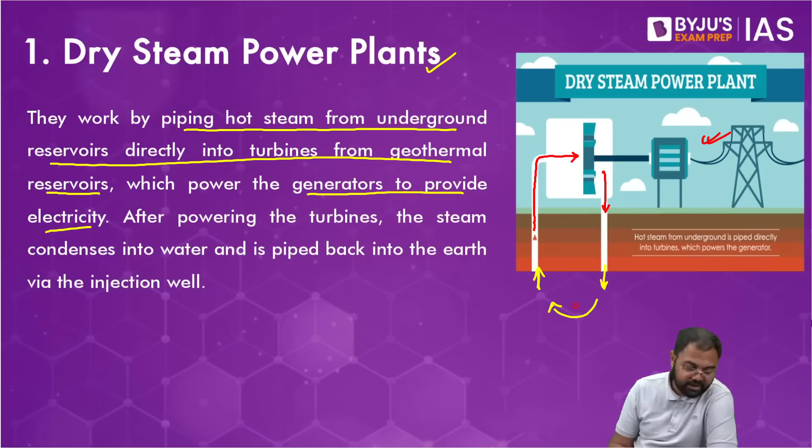Then we have the flash steam power plant. In case of a flash steam power plant, the design is a little more complex. There is one extra layer of complexity added, and that is something called the flash tank. This right here is called the flash tank.

In this scenario, in the flash tank, the heat coming from inside the earth is maintained at high pressure. Now at high pressure, water can retain more heat without converting into steam. Generally, at normal pressure, at 100 degrees Celsius water will convert into steam.

But when you have high pressure, the heat absorption capacity of water increases. So even if you are at 150 degrees Celsius, you can still have liquid water. At normal pressure, 100 degrees Celsius gives you steam. But at high pressure, even at high temperature, the water will still not convert into steam form—it remains in its water form, and that is precisely what is used in this scenario of the flash steam power plant.

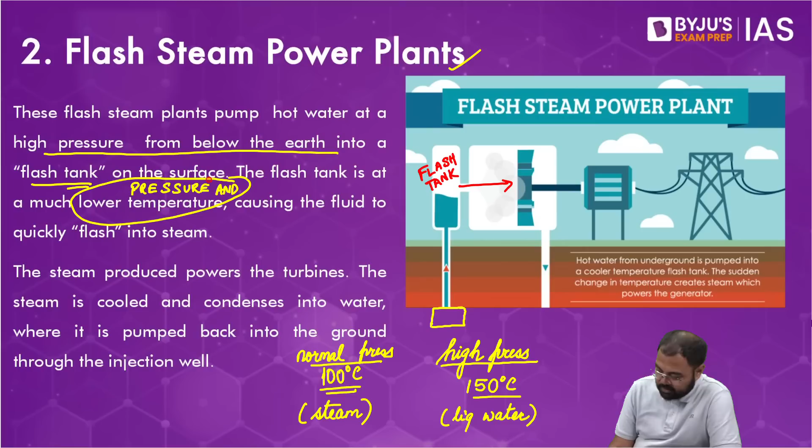Then after that, there is something called binary cycle plants. The term says binary, meaning two, because there are two cycles running parallelly here. That's why it is called a binary cycle plant.

So what happens in this scenario is there's one cycle above and one cycle below. The below cycle is the heat from inside the earth, the steam or hot liquid water coming from inside the earth. That is one cycle. The second cycle is of an organic liquid. Remember what we discussed in fractional distillation, that organic liquids have lower boiling points.

So what happens is this organic liquid has a lower boiling point. As soon as the heat from inside the earth comes in contact with it, it will very easily convert into steam with lower energy requirements. That's why they're called binary cycle plants. It converts into steam and again goes to the turbine, rotates the turbine, and generates electricity from there.

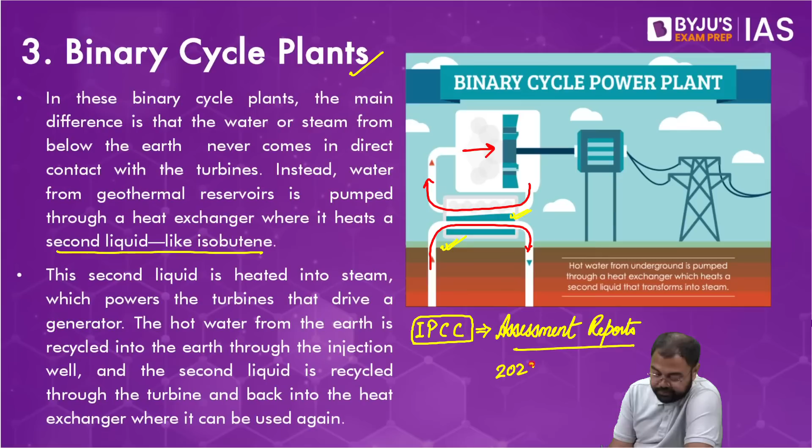For example, there is something very crucial that they produce called the assessment report. These assessment reports, until now there are 6 that have been published. The latest one was last year in 2022. These 6 assessment reports come every 5 years, every 7 years, and so on. For example, the fifth assessment report came in 2014, and the sixth came in 2022.

So they do exhaustive research on all the data and studies done on climate change, and try to draw a conclusion and publish those reports. So they become very crucial. Now there was another study based on all the different types of renewable energy and how polluting those renewable energies can be, or whether they are also contributing to pollution and climate change in one way or another.

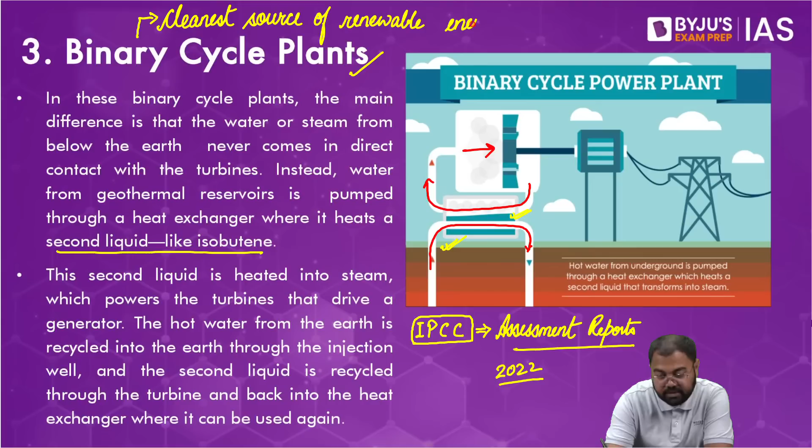In that study, what they found is that binary cycle plants are the cleanest source of renewable energy. This is what IPCC said. So even compared to solar energy, wind energy, biofuels, and even other forms of geothermal energy, binary cycle plants, according to that report, is the cleanest source of energy. That is the importance of binary cycle plants.

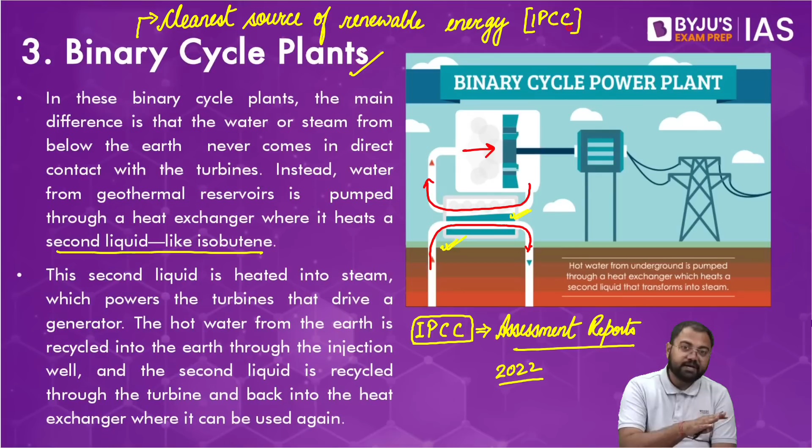And right now that's why we're working on binary cycle plants. We also want to build these plants in future projects. Dry steam power plants have the least efficiency; they are the least efficient. Compared to them, flash steam power plants are better, and compared to that, binary cycle plants are much better. That is why they were actually in news a couple of years back.

Now, coming to geothermal energy, there are certain areas where we have been able to map the presence of geothermal energy in India. The total energy potential for India is said to be 10 gigawatts, and there are all these areas that have been marked for those 10 gigawatts.

So you have the Himalayan areas, starting from Ladakh, then Himachal, Uttarakhand, and then also Sikkim and Arunachal Pradesh. These states have been marked because we know the tectonic lines run like this, and that is the reason why these areas are so good with regard to the potential for geothermal energy.

But apart from that, there are other areas also, for example the Sonata region, or the Son Narmada Tapti region, that also has been marked. And apart from that, there are other areas also that have been marked. So we see there are all these potential areas where there are chances that India has geothermal energy. ONGC is basically mapping India's 10 gigawatt geothermal energy.

This is basically that, something that ONGC is doing, and even this map basically is an ONGC map. This map also is a potential map that was published by ONGC with regards to India's potential in geothermal energy.

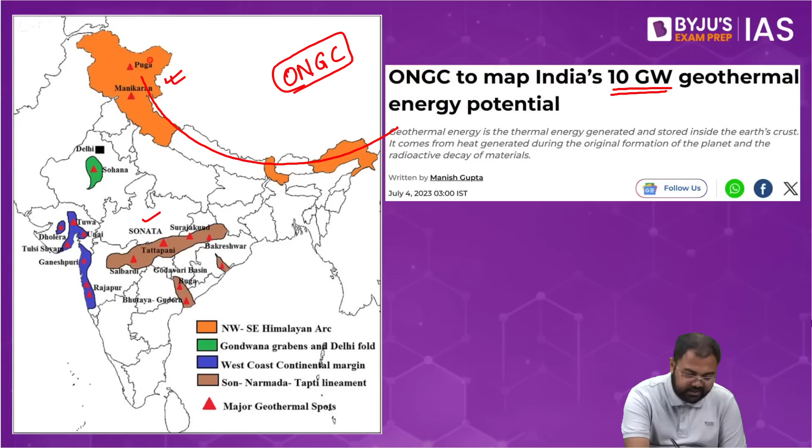Right now we have taken small steps in regards to what we are doing with geothermal energy. We have marked certain areas. For example, this right here, the Puga Valley in Ladakh, this Puga Valley area in Ladakh, it becomes a very crucial area for India. This is where there was an MOU also that was signed between ONGC Energy Center and Ladakh Autonomous Hill Development Council for the first geothermal plant that basically is being developed in the Puga Valley.

So Puga Valley is in Ladakh, very beautiful place. You'll see that there are hot springs all around Puga Valley. So that is what they want to tap. By tapping it, they will try that at least the local requirements of energy can be sorted, because these are very harsh areas, very far off areas, remote areas, away from any thermal electricity source or hydroelectricity source.

So getting electricity there for the government of India hasn't been a very easy task. So this is where all the local requirements of those areas, the villages nearby, the townships nearby, that can be solved with the help of these energy sources. So that is how in Puga Valley we are seeing this development.

At the same time, the Geological Survey of India has identified that there are almost 340 geothermal hot springs in the country, which can become potential sites for geothermal energy in India. Apart from that, we saw that last year there was another development where Geothermal Core of Texas has signed a letter of intent to invest rupees 820 crores in producing geothermal energy in the state of Uttar Pradesh.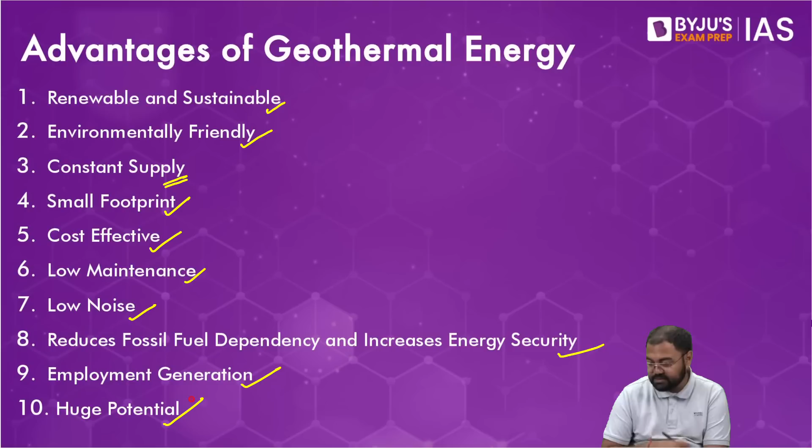So advantages more or less self-explanatory. Disadvantages, the very first disadvantage is geographical limitation, because it's not like solar energy that you can get from anywhere, or wind energy where we know there are areas from where we can very easily get this energy. First and foremost, here we need to identify the areas, identify the hot springs which are good enough, conducive enough to get energy from. So there are n number of reasons that come in the way of using geothermal energy, and that's why it needs a lot of investment. Then at the same time there could be possible environmental impacts, because these are areas from where hydrogen sulfide gas could also be produced.

Potentially, there could be hydrogen sulfide gas released, though we haven't seen that happen yet. There are also sustainability concerns—whether these geothermal sources are good, long-lasting sources or not. So there are all these issues.

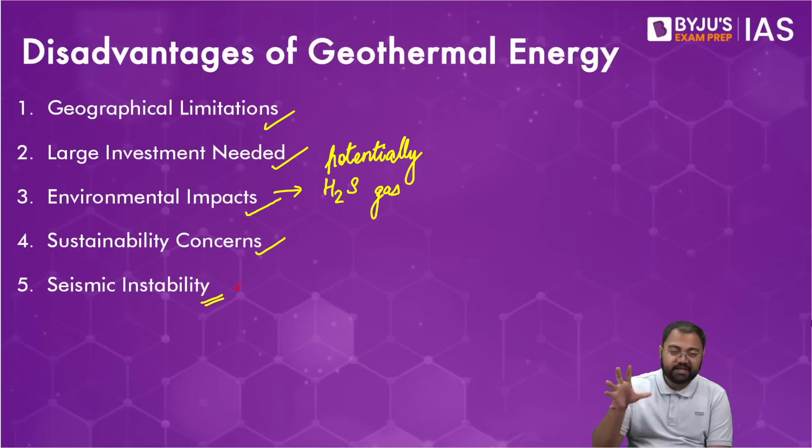Lastly, there are chances of seismic instability in these areas, which can also be prone to earthquakes. You know about India's tectonic lines—they are very unstable. Very recently we saw a couple of earthquakes with epicenters in Nepal, the same Himalayan region. We see that kind of instability in states like Uttarakhand, Himachal Pradesh, and Sikkim too. So these are not areas which are very stable, and there are chances of seismic instability being induced because of geothermal energy.

There are examples of this happening in the past, not in India but other parts of the world—one in Switzerland, one in the US. In both cases there was a small earthquake, on the Richter scale perhaps just 3.7, 3.8—not huge. But when researchers studied the epicenter and possible reasons, they found these were areas where geothermal energy power plants had been set up, and that was leading to these scenarios of instability. So these are all the problems that geothermal energy could bring with itself.

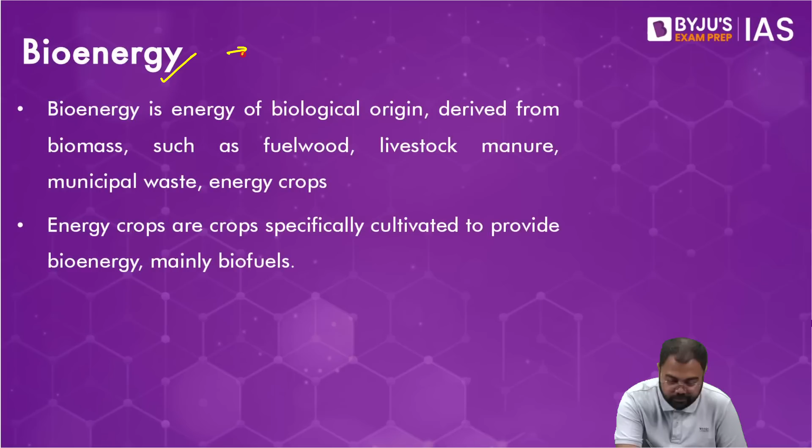Now coming to the last source of energy in this segment: bioenergy. What is the meaning of bioenergy? It's energy coming from biological sources. But then coal and petroleum are also coming from organic sources only—so where's the difference between bioenergy, from which we get biofuel, and fossil fuels like coal and petroleum? The basic difference is time.

Bioenergy is produced in a very short span of time—maybe a few days, a couple of weeks, a couple of months. That's it. So the time taken here is much less compared to the time fossil fuels take—millions of years, 300 million years. So 300 million years on one hand, 2 weeks on the other. There's no comparison.

So bioenergy is energy of biological origin derived from biomass. Biomass is the biological material from which energy is extracted. It's the biological material derived from living or recently living organisms—whether plants, animals, animal waste, or plant waste, all these are called biomass. This biomass becomes our source of energy, our raw material from which energy is derived.

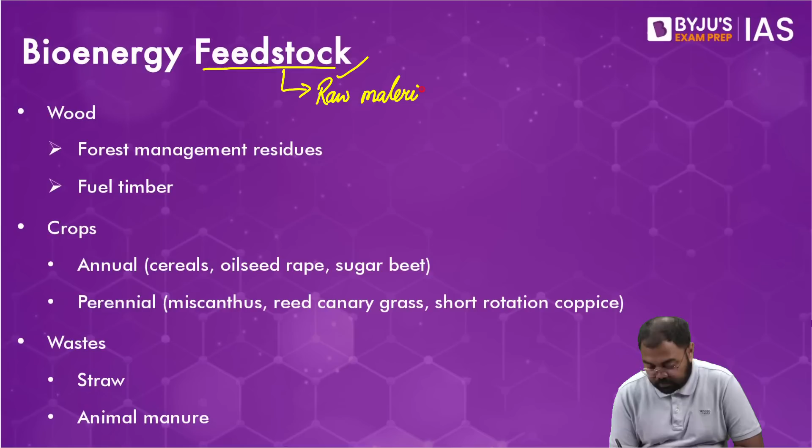Now feedstock is nothing but the raw material. There can be multiple kinds of raw material—you can have waste, crops, wood. There are multiple things that can be used as feedstock or raw material for biofuel production.

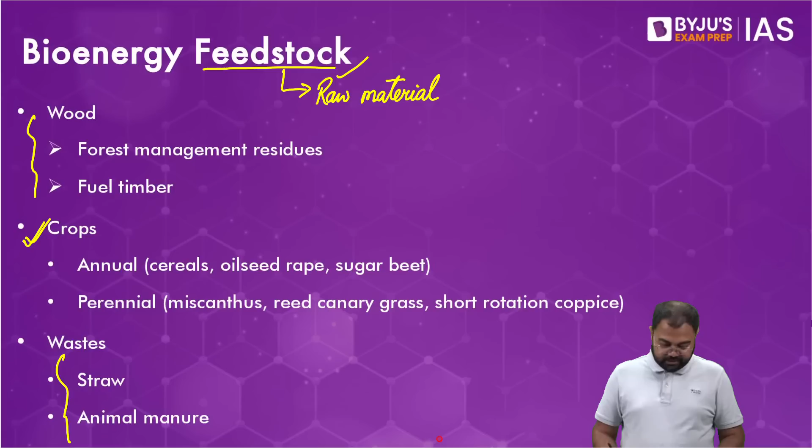So we started from bioenergy. There are also energy crops, which are specifically cultivated to provide bioenergy. So bioenergy, biomass, feedstock, energy crops, biofuels—there are 5 terms. Let me explain: you have bioenergy, which is energy from biological sources.

Then there are specific types of crops which are cultivated for this kind of energy production—these are called energy crops. So energy crops are the crops that provide energy. What kind of nutrient is the source of energy for us? Carbohydrates, right? So these energy crops are the sources of carbohydrates.

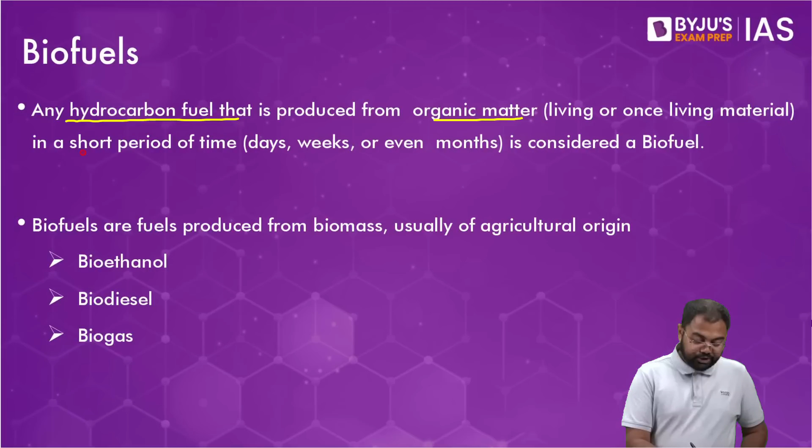And then lastly, we have the term biofuel. So what do we mean by biofuel? Any hydrocarbon fuel that is produced from organic matter in a short span of time will be called biofuel. That's the basic difference between biofuel and fossil fuel. Fossil fuel also comes from organic material, organic source, but in millions of years. Whereas in case of biofuels, something similar happens in just a few days or a few months. That's the basic thing, and that's why short period of time is very crucial here.

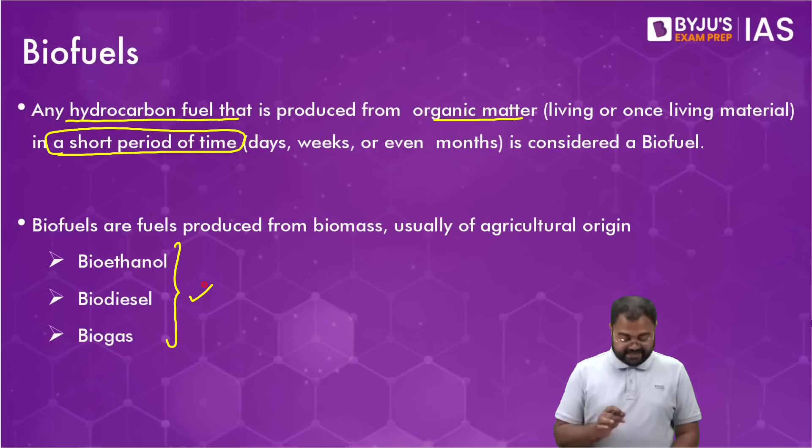Now, in this scenario, we see that there are different types of biofuels. We have bioethanol, biodiesel, and biogas. When it comes to biofuels, we divide all the different types into different generations. This classification has been done on the basis of what raw material is being used and what technology is being used.

So first we have the first generation biofuel. The first generation biofuel is basically based on food crops. These are food crop based, meaning the same food crops that we also consume can be used as a source of biofuel production. For example, we use corn, soya bean, we can even use rice or potato, we can use oil seeds of different types, we can use all of them, and we use sugar cane here. So all of these are basically based on food crops. That's why this is called first generation, where you can say that the biofuels are competing with our food. So in that case, it is the first generation biofuel.

Then after that, we have the second generation biofuel. Second generation biofuel is where we start changing things up. It can come from agricultural waste, and it can also come from municipal waste. So instead of using something in direct competition with our food, now we are using something we are not bothered about, something we are at least not going to eat. So that's agricultural waste, municipal waste, and non-edible crops. We are basically trying to get our source from here.

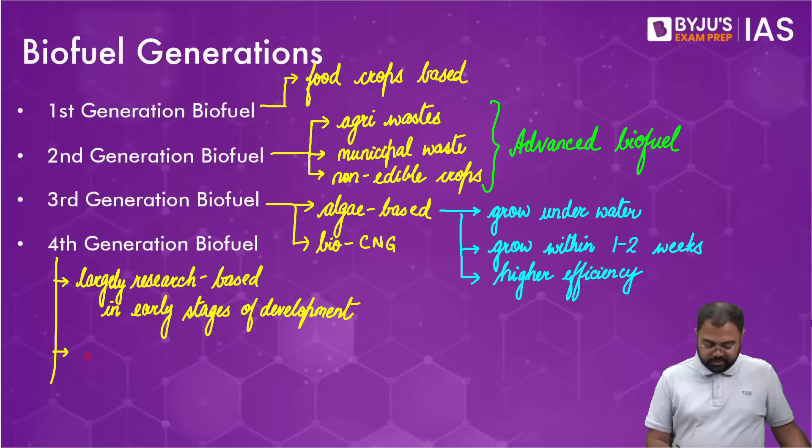Okay, so this is basically how we have our fourth generation. They are largely research based in early stages of development. So there are multiple ways in which we are trying and looking at the fourth generation. For example, we might use genetically modified organisms here. We also want to use microorganisms here, so microbes could become a source, and genetically modified organisms can become a source.

Second generation source with carbon sequestration can also become a source. This is also something that we are trying, that whatever small pollution happens because of carbon dioxide emission in the first and second stages, we basically want to get rid of that. Use the same source as the second generation, because anyway that is based largely on wastes. So use the same source, but whatever carbon dioxide is emitted from there, just take away that carbon dioxide, store it, capture it. So that basically is called carbon sequestration.

What is carbon sequestration? Capturing and storing carbon dioxide. So that basically is carbon sequestration.

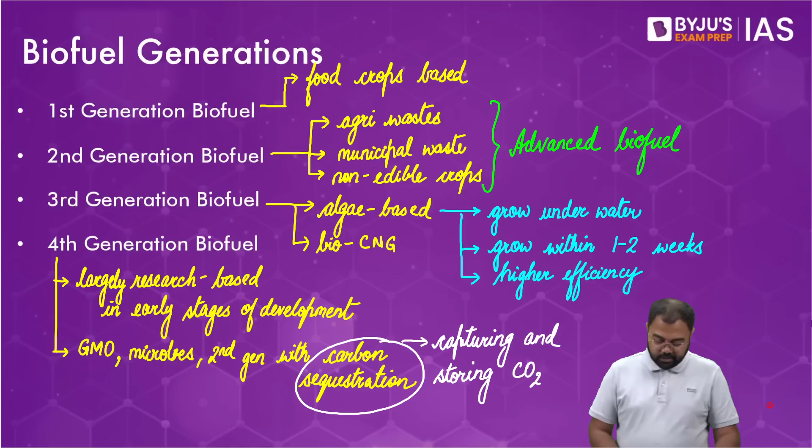So largely we are still in the first generation itself. Not only India, I'm talking about the world. The world right now is largely in the first generation, and we are still trying to move away from first and use more of second generation as much as we can. So we are actually trying to get into the next stages.

All right, so largely when it comes to the types of biofuels, there are two major types: biodiesel and bioethanol. Biodiesel is something that we get from vegetable oils, through the process of esterification. So vegetable oil or any oil seed can become important here. And then when it comes to bioethanol, that is something we get from the fermentation process of all these energy crops.

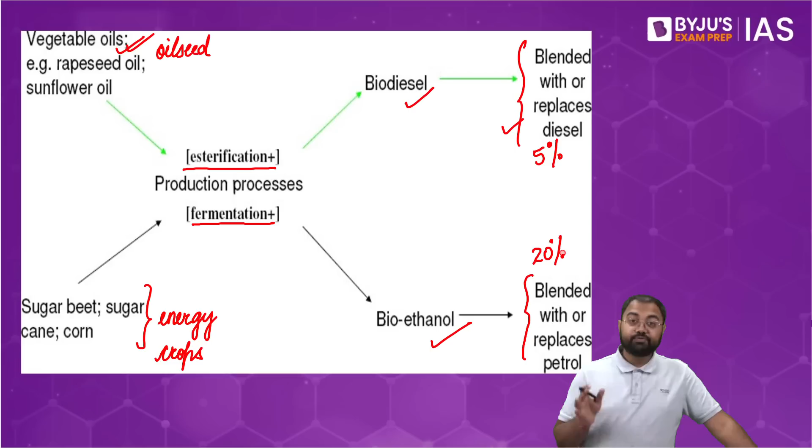Biodiesel is something that can be mixed with, or it can replace diesel, and we'll go into the details of how exactly all these things will happen in India tomorrow. But we know that biodiesel can be mixed with diesel, or it can even replace diesel. In case of bioethanol, it can be blended with petrol, or it can replace petrol altogether. So we are looking for a blending. For example, India has a target of 5% blending of biodiesel with diesel, and a target of 20% blending of bioethanol with petrol. So this is basically where we want to head in the coming years.

So both biodiesel and bioethanol are going to be very, very important, because they have a huge positive impact on pollution. For example, biodiesel can reduce the exhaust emission by up to 80%, carbon dioxide exhaust emission. There is no sulfur dioxide. Even the particulate matter PM 2.5 and PM 10 can be reduced by up to 75%. Then even when it comes to the flash point, that is higher too, which makes biodiesel a safer fuel as compared to normal petroleum diesel.

So there are so many things, and they can even provide significant lubricity improvement as well, so it can become an easy source for lubrication of machine parts and engine parts, and hence increase the capacity, make it better and improve the working of biodiesel. So there are all these advantages that we have with biodiesel altogether, and that's why we want to use biodiesel as much as possible.

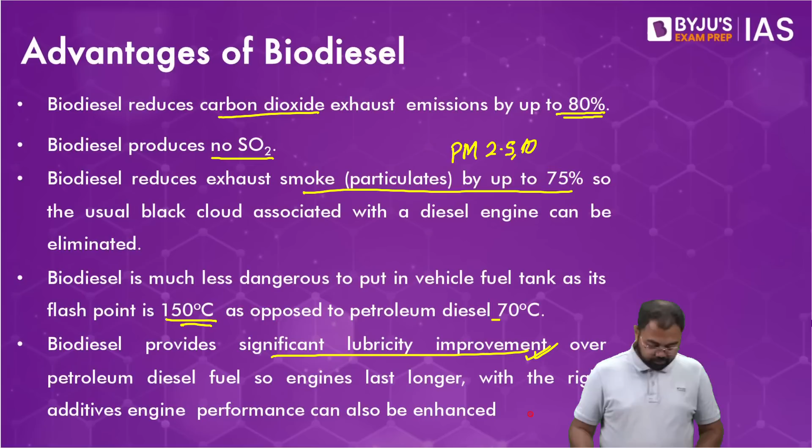We saw that the conversion rate of jatropha was very poor. So two things happened with jatropha. Although it's not that we are not using it as a source today, we see that we are not using it as a primary source anymore. We used to. Two things: one, it takes a lot of time to grow, 6 to 7 months, for biodiesel production—that's one problem. And second, the conversion rate is very poor.

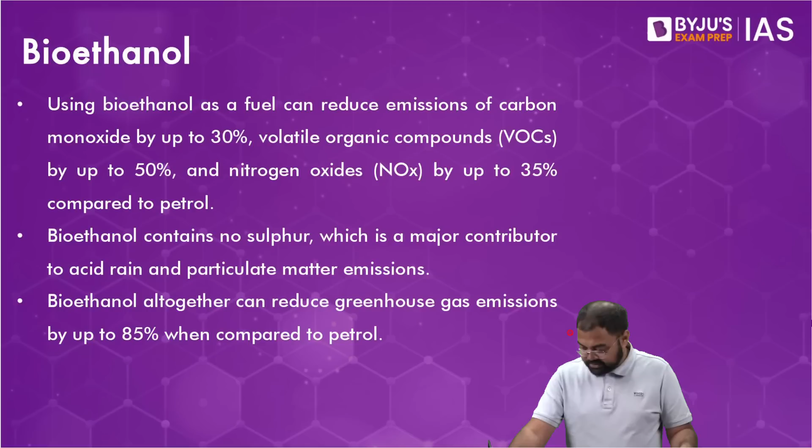Better, when we go to the biotechnology portion, we'll discuss this there.